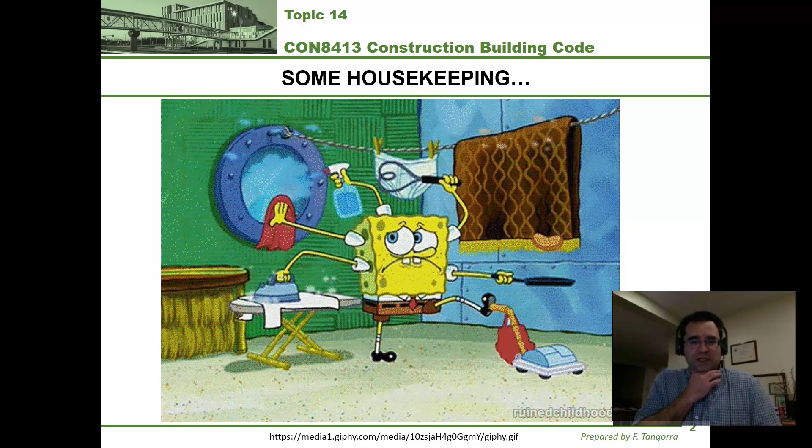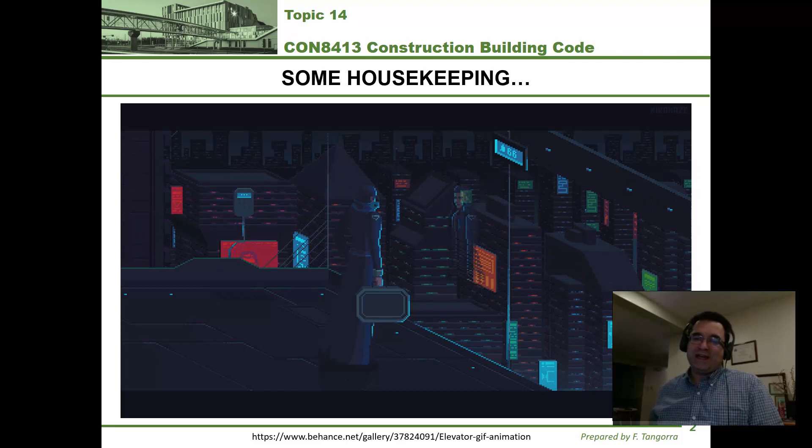Now, for the topic at hand, what exactly am I going to be meaning by vertical transportation and service facilities as they pertain to Section 3.5 and 3.6 of the Ontario Building Code? Well, perhaps this music will give you a hint. That's right. If you recognize this style of music, it is commonly known as elevator music. So then, we will be chatting a little bit about elevators today, among other things.

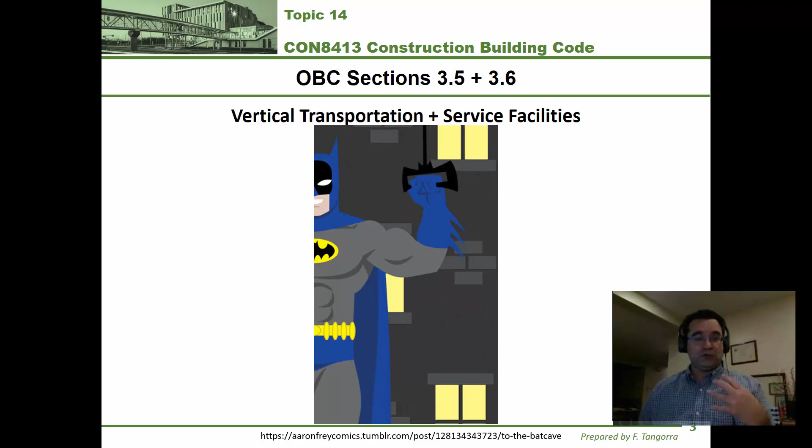Or in more general terms, we will be looking at the implication from moving people, air, and other items vertically through a building. You see, for the purposes of vertical transportation, we're really talking about what could be considered vertical tunnels going through a building. And when you penetrate through a floor, a roof, or another structural system with these tunnels, you're essentially punching a hole through that structure.

Specifically, what I mean is that the integrity of the fire rating may be compromised, or at the very least, we need to be aware of, for the purposes of this introductory code course, the building code provisions that are required to maintain the fire rating of the building whenever we punch through a floor because of an elevator shaft, or punch through a roof because of air ducts and garbage chutes.

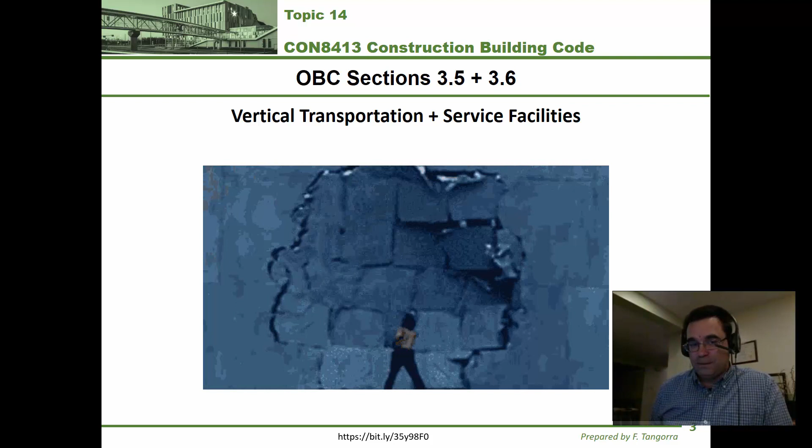Now the arrow is not pointing in the actual direction the air moves, it's just to illustrate the air moves through there. And then you can see on the side of this air duct, there are smaller ones that then penetrate into the walls to deliver air, or take air, from those floors, right? Each one of those stories. Make sense? So you can see how delivering air to a whole building is going to punch through walls and ceilings and floors.

Similarly, when we look at a typical elevator shaft with an elevator that's allowed to move vertically through a building, do you see how it makes sense that in a typical building, not necessarily our very own ACE building because it's fully exposed, that elevator shaft basically punches vertically through a whole bunch of floors? It's the only way that you can get people to every story. So, right? Can you see how it is important to know how to ensure that the fire rating of the whole building gets maintained as you punch through it?

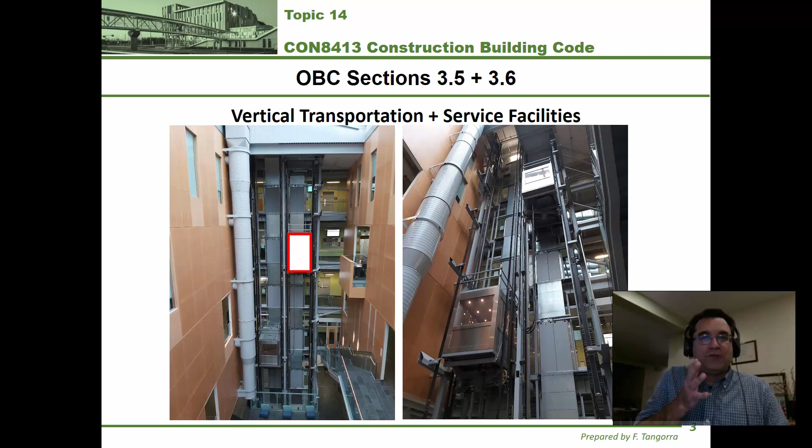Luckily for us, the way to figure out the fire resistance rating of an elevator shaft, or as it's more properly known, an elevator hoistway, is relatively simple because it's very similar to the way we figured out the fire protection rating of closures for the Ontario Building Code. Remember when we covered, I think it was topics 7 and 8.

And we spent a fair bit of time, I believe it was under topics 7 and 8, in figuring out how to come up with the fire resistance rating of a floor assembly. So if you don't remember, go back to those topics to look it up. But let's do an example, okay?

If you have a floor that's, say, rated at 2 hours, then from this table it will tell you that the elevator hoistway, the elevator shaft, must be rated for an hour and a half to maintain the fire rating of the whole building, to make sure it's safe. Or, if the fire resistance rating of the floor is 1 hour, then the rating of the elevator hoistway must be 1 hour, and so on and so forth.

Does this remind you of how we did it for closures, right? The fire rating of closures? Go look it up. I'm sure it will come back to you once you look it up.

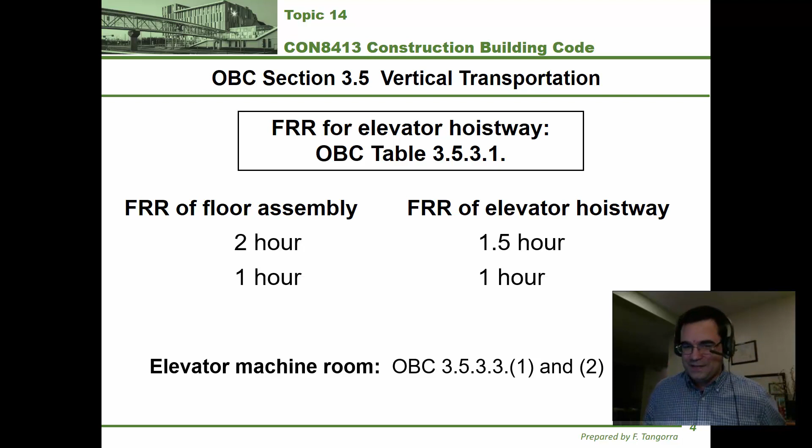Right. Moving on to section 3.6, service facilities. This topic, for as briefly as I will cover it, deals with very specific rooms and spaces in a building, and how these rooms and spaces need to be fire rated and possibly properly separated from the rest of the building, for a number of reasons. So these include rooms like electrical rooms, mechanical rooms, telephone rooms, air ducts, garbage chutes, garbage rooms, and so on

and so forth. For the purposes of section 3.6 of the Ontario Building Code, these rooms are covered by slightly different provisions than the rest of the building. And you can find these details under sentence 3.6.2.1(1) all the way to sentence (11). I would expect you to go over and read these sentences, pretty please. One specific one that I want to point out to you is that in the building code, the word electrical room actually means something different from the words electrical equipment vault. So I recommend you look both of these up.

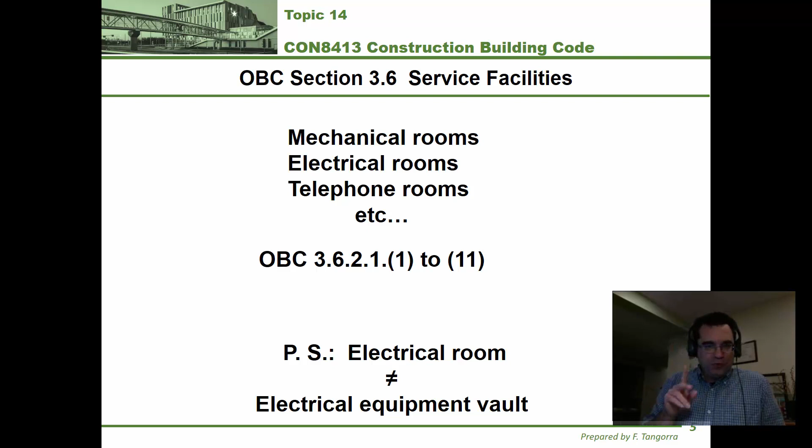And I'm winking at you, okay? I'm not sure if you can tell.

Very well. Moving on to mechanical shafts. If you have a mechanical shaft that's punching through a number of floor systems in a building, it's kind of like an elevator hoistway, right? The mechanical shaft is a big chimney that goes through a building if it's there to deliver air, for example, right? Hot air or cold air. And it has to be fire rated properly to maintain the fire assembly requirements of all the floor systems.

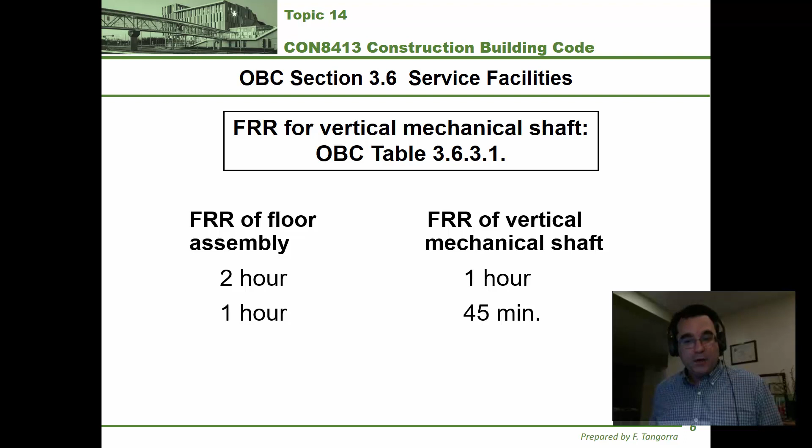For this, you would go to table 3.6.3.1. Once there, that table is set up exactly the same way. As long as you can find the fire rating of the floor assembly you're looking at, then you can go across that row in the table and you can find the necessary fire rating for the mechanical shaft. For example, if you have a 2-hour floor assembly, then the mechanical shaft has to be rated for 1 hour. Or, if you have a 1-hour floor assembly, the mechanical shaft must be rated for 45 minutes, and so on

and so forth. If it can help, again, envision vertical mechanical shafts basically as a transportation superhighway that's moving air throughout the building, and that includes both air that's being brought into the building, warmed up or cooled and shared within a whole bunch of the rooms in that building, as well as the air that's being sucked out of these rooms and then expelled outdoors. So typically, as you can see, these mechanical shafts need to be continuous, right? They operate in this cycle of in air and out air, and they therefore have to be properly built to prevent fire from getting into these shafts, because once the fire gets in there, it can easily spread everywhere.

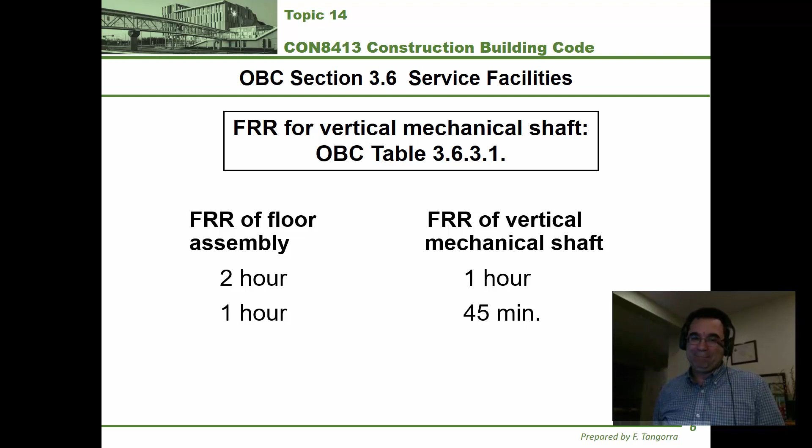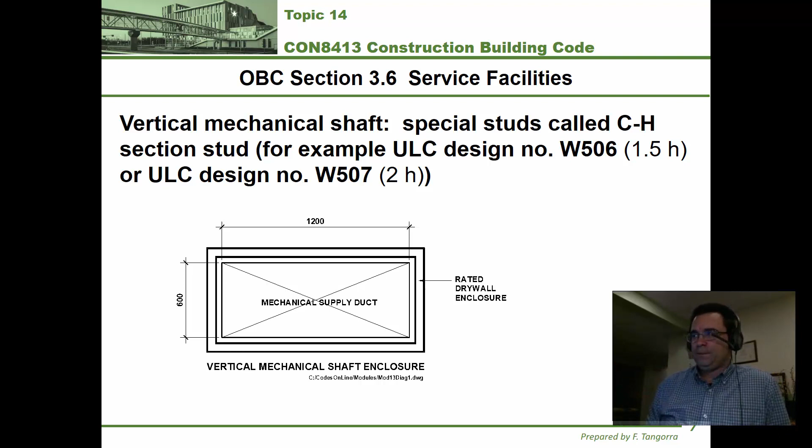If you've ever lived, or you currently live, in a multi-story apartment building, you're likely familiar with garbage chutes, right? And these chutes are basically, again, also vertical transportation highways for stuff that you don't want. You know, garbage, right? And if you've ever tried to throw the garbage into these chutes, you know how sometimes when you push it into the chutes, it can get stuck, right? So you can see how it makes sense that if there is ever a fire in that garbage chute, and the garbage chute and the garbage room are not properly fire rated and separated from the rest of the building, that fire can really spread because there is kindling for this fire throughout the chute, with all these stuck pieces of garbage.

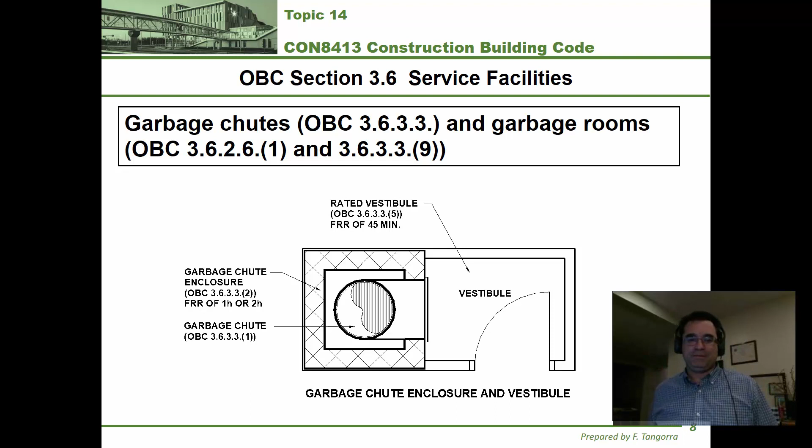Alright, I want to remind you that the homework is posted for you. So that includes homework 9, but everything else also before this. And all the solutions for your homework are posted. The solutions will become visible as soon as you click and view the homework.

I also want to wish you good luck on our upcoming test. I believe it's test 2. I know you're going to rock it, but I also know that it's going to take a fair bit of work on your part to prepare for it, because this test will cover everything up until now. So even everything that was included in test 1. But you can do it. I believe in you. That's it.